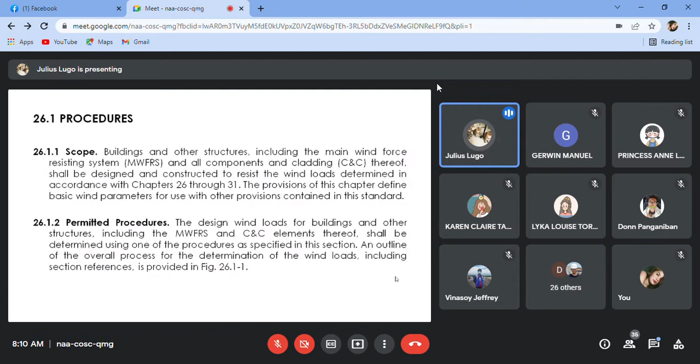In here, we won't be talking about the Philippine setting, but rather the US setting. Though we are using the US setting, in your design later on, it's up to you kung anong gusto nyong gamitin. Pwede kayong mag-NSCP. Actually, halos pareho lang naman yung provisions ng ASCE sa NSCP. Nagkaiba lang yung mga load factors, yung mga constants na ginamit, pati yung variables, kasi magkaiba tayo ng wind loads sa ibang bansa.

Pero if I were you, just use whatever is available in STAAD, kasi pipick ka lang naman doon kung ano yung gusto mong gamitin. Hindi ko alam kung may NSCP doon, pero maraming codes in STAAD. Do you all have STAAD in your computer?

Yes, sir. Okay, so later on, midterms, we will be doing models. Pero hindi na ako magdi-discuss nun, kasi walang STAAD tong computer ko, at saka bulok na siya. Hindi siya pwedeng mag-run ng mabigat na software. So I will just be sending you a video tutorial for STAAD.

Next is permitted procedures. The design wind loads for buildings and other structures, including the MWFRS and C&C elements thereof, shall be determined using one of the procedures as specified in this section. So meron tayong outline. Mamaya, ipapakita ko kung paano natin i-determine yung loads natin for the wind. So yung main wind force resisting system natin shall be determined using one of the following procedures.

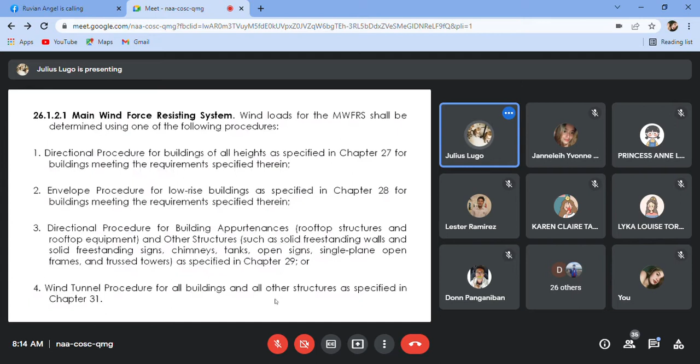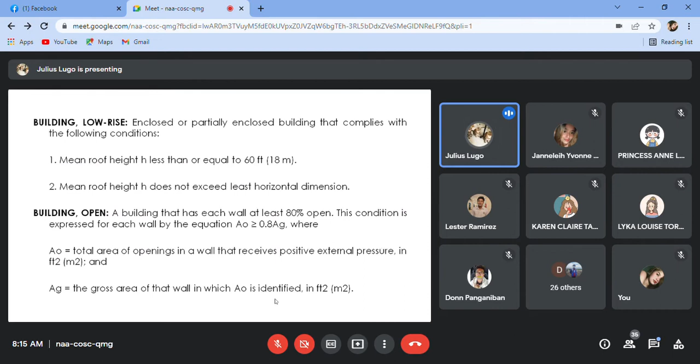Okay, so I'm going to be skipping the definitions because there are so many. Please feel free to read this tomorrow, maybe during our laboratory. Whatever we don't finish today will not be part of the prelim exam, but you have to read that. Although, as I said, the prelim is more on discussion because on the syllabus, we have to discuss the wind loads and loadings before we go to the modeling, okay?

So chapter 26, that's what we're going to discuss today. That's the general requirement used to determine the basic parameters for determining wind loads on both the MWFRS and C&C. These basic parameters are the basic wind speed, which is included in the NSCP, the wind directionality factor KD, exposure type, topographic factors, ground elevation, velocity pressure, gust effect factor, enclosure classification, and internal pressure coefficient.

Upon identifying the general requirements, we now proceed to the methods for both the MWFRS and the C&C. Chapter 26 is on general requirements, then chapters 27, 28, 29 are the procedures for the MWFRS, and your wind loads for the C&C are stipulated in chapters 30 and 31. Chapters 27 to 31 I didn't include in our presentation. We're just going to talk about the general requirements because if I included those, it would take the entire semester, and how much more our seismic analysis.

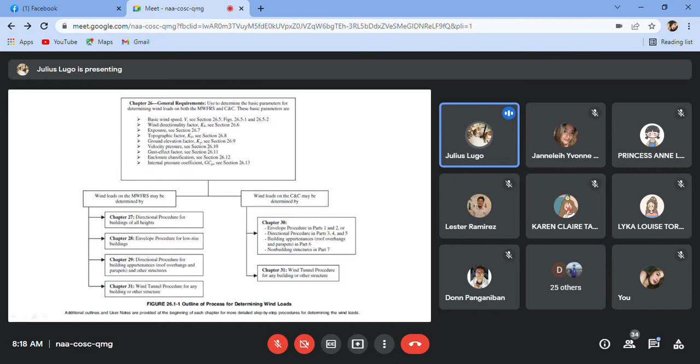So the general requirements. We have the sign convention. When your wind force tends to approach the surface, we consider that as positive pressure. If it tends to go away from the structure itself, you have to put a negative sign for the wind loading. So if it acts on the object, it's positive, like compression and tension. But if it acts away from the object, it should be negative. So that's our sign convention.

Then we have the critical load condition. Values of external and internal pressures shall be combined algebraically to determine the most critical load. So here we just take the sum. We superimpose the internal and external pressure because the wind load is applied not only outside but also inside. So you just take the algebraic sum of the wind loads externally and internally to get the most critical load condition.

Then we have 26.4.3, wind pressures acting on opposite faces of each building surface. In calculation of design wind loads for the MWFRS and for C&C for buildings, the algebraic sum of the pressures acting on the opposite faces of each building surface shall be taken into account. What if on the facade and the rear of the building, both forces are acting towards the structure? Just apply the summation of forces, horizontal and vertical, and take the magnitude of the resultant of the opposing wind pressures, because not every building has forces acting only towards, or towards and away from, the object.

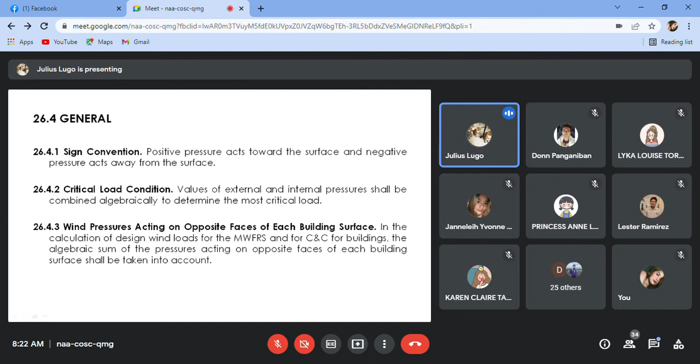Then we have to identify the risk category of the building. This really depends on the hazard map. We have a hazard map in the ASCE code, but I didn't include all of it since there are so many hazard maps, and that hazard map is US-based. So our basic wind speed, V, used in the determination of design wind loads on buildings and other structures shall be determined from figures 26.5-1 and 26.5-2.

The identification of your basic wind speed, V, will be through figures 26.5-1 and -2, except as provided in sections 26.5.2 and 26.5.3. So don't get confused—whatever isn't stated in 26.5.2 and 26.5.3 regarding basic wind speed, go to figures 26.5-1 and -2, and that will be your basic wind speed.

Now, we have different types of risk categories: category 1, 2, 3, and 4. For category 1 buildings and structures, we use 26.5-1A and 26.5-2A. For category 2, we use 26.5-1B and 2B, and so on. So you have to check what risk categorization applies, and the basic wind speed will be identified through the respective figures stipulated in 26.5.1.

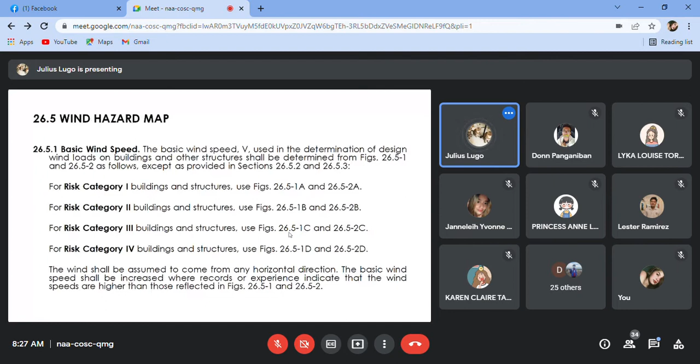Next, special wind regions. We have mountain terrain, gorges, and special wind regions shown in figure 26.5-1 shall be examined for unusual wind conditions. The authority having jurisdiction shall, if necessary, adjust the values given in 26.5-1 to account for higher local wind speeds. Such adjustment shall be based on meteorological information and an estimate of the basic wind speed obtained in accordance with the provisions of 26.5.3.

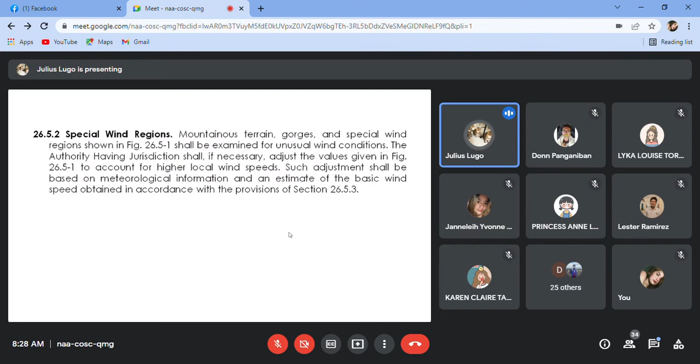So in the case of terrain, mountainous regions and similar, identifying the basic wind speed is not straightforward. You can't just use figures 26.5-1 and 26.5-2 for mountainous terrains and other similar geography, because our basic wind speed assumes horizontal terrain. But in mountainous regions, it's not always horizontal since there's sloping involved.

So here, the authority having jurisdiction should be the one to identify the basic wind speed for that particular region, based on section 26.5.3, to estimate the basic wind speed. I think in the Philippines, that authority having jurisdiction would be the Association of Structural Engineers of the Philippines.

So the estimation of our basic wind speeds comes from regional climatic data. The authority having jurisdiction will be soliciting resources from the Meteorological Society or the regional climatic organization, such as Pag-asa, to determine the latest trend.

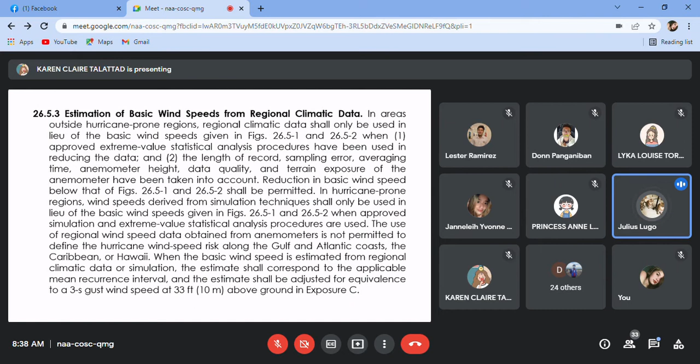So we have different types of exposures that will be discussed later on, but for now I'm just giving a general idea with regards to the exposure type. It depends really on what exposure your building has, and we have conditions on how to determine the exposure type of the building. So let's go to the next slide.

So this, guys, is what I mean by regional climatic data. It's like a topographic map. Have you seen, guys, what is it called? Have you seen a hydrograph?

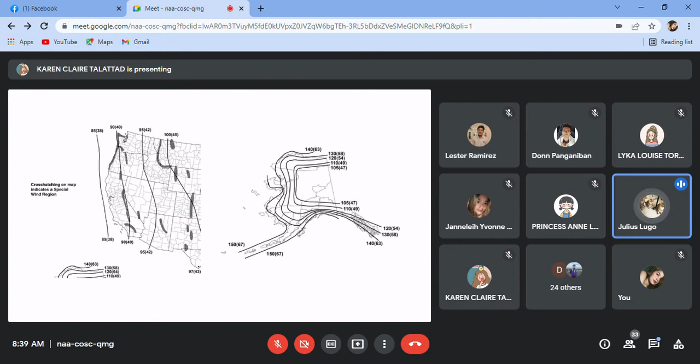You haven't seen that. So these lines, guys, just pertain to the average wind speed, the basic wind speeds of that region. If these lines are connected to each other, similar to your topographic map, those places along that line, along that curve, actually have the same wind speed. It's the same concept as your topographic map.

So in the first figure, you see there, the first curve is 100 and then 45. I think the 100 there is 100 miles per hour, and the one in parenthesis, I think that's 45 meters per second or so. So this, guys, is what we call the wind map, our wind hazard map. The crosshatch there indicates the special wind region.

So, hanapin dito yung place, and then how about if yung inyong place is in between two hatches? What if in between siya nung dalawang place or yung dalawang curve? For example, in the left side, we have 95 and then 100. What if in between siya?

Well, ang ginagawa natin dyan, to simplify the computation, we are not going to take the average. We just consider which is higher in terms of the two cross hatches. So if you were to pick between 95 and 100, hindi pwedeng 95 plus 100 divided by 2 yun na yung magiging basic wind speed mo. Hindi. Ang gawin mo, piliin mo na lang yung higher na curve.

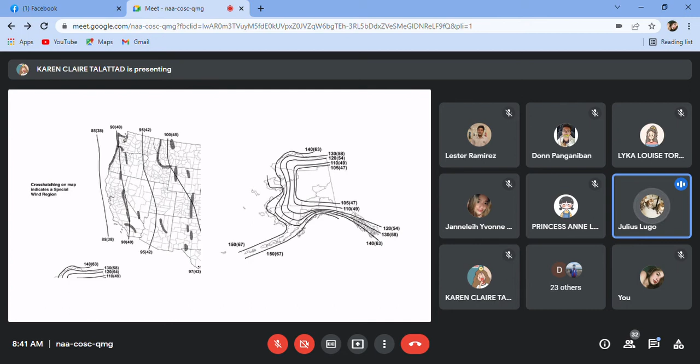Okay, next po tayo. So, meron tayong dito notes for the figure. I won't be doing in-depth discussion of that. Next po.

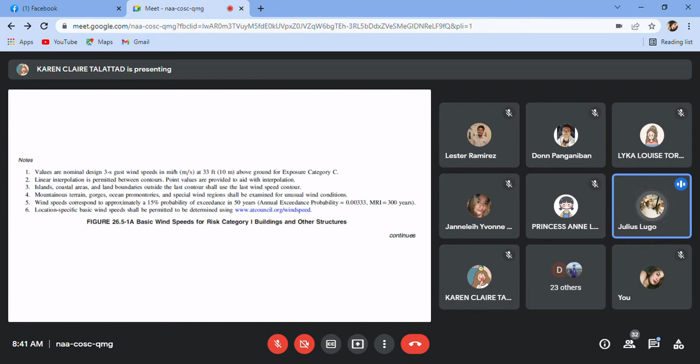So meron din tayo nito. This is a continuation of the map. Meron tayong ibang locations in here. As you can see, meron din tayo dun sa may left side, guys. Parang circular siya, or sabihin na lang natin pa-oval na graph ng wind, basic wind speed natin. So that's 105. And then meron din tayong point lang, kasi in this particular area, the wind speed is 107 miles.

Parang isang point lang siya doon kasi doon lang naman may 107. So meron tayong pa-circular that indicates that the regions around this line are actually having a basic wind speed of about 105 miles per hour or 47 meters per second. Next po.

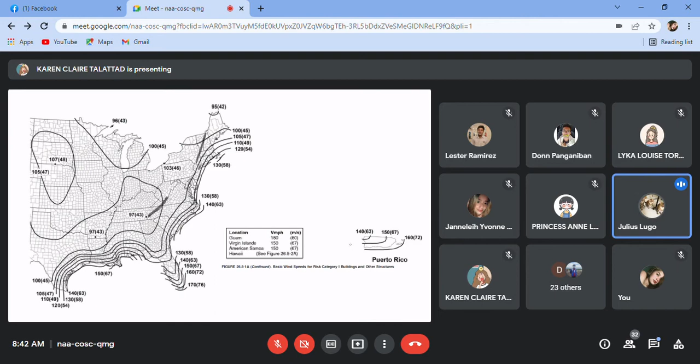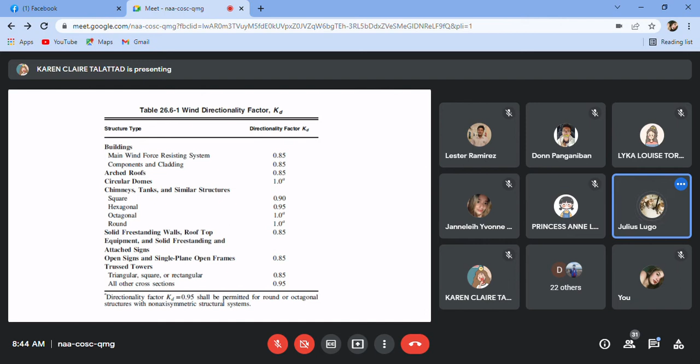So yung directionality factor KD natin will be 0.95. This is permitted for round or octagonal structures with nonaxisymmetric structural systems. Kung meron kayong octagonal or round na structure pero non-symmetric, hindi magkamukha yung half-half nila, you can use KD as 0.95. Follow lang natin tong table na to later on in determining the KD factor. Next po.

Normally, guys, for the MWFRS, 0.85 yung ginagamit. Kapag sabing MWFRS, hindi na kayo titingin sa iba. The wind directionality factor shall be determined from Table 26.6-1 and shall be included in the wind loads calculated in Chapters 27 to 30. The effect of wind directionality in determining wind loads in accordance with Chapter 31 shall be based on a rational analysis of wind speeds conforming to the requirements of 26.5.3 and Section 31.4.3.

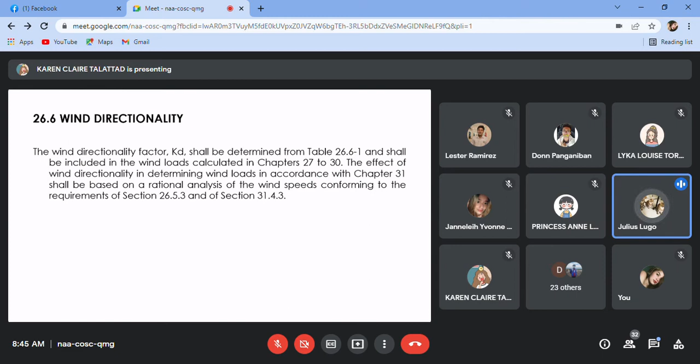A thorough discussion will be made on Chapters 27 to 30. That is for the MWFRS. Next po. So ito naman yung exposure natin. Ano ba itong exposure? For each wind direction considered, the upwind exposure shall be based on ground surface roughness that is determined from natural topography, vegetation, and constructed facilities.

If your building is standalone at walang obstruction, nasa open space lang siya, there's actually a great influence of exposure in the calculation of the wind loads. Kung wala kang masyadong obstruction, yung wind mo will have a great impact on the structure. Pero kung maraming puno and maraming structure around the building that you are designing, walang masyadong exposure.

So that's why we consider exposure. If we do not consider exposure kasi, that will actually compromise your design in terms of economy. Okay, in terms of the economy.

Okay, so wind directions and sectors naman: for each selected wind direction at which the wind loads are to be determined, the exposure of the building or structure shall be determined for 2 upwind sectors extending 45 degrees on either side of the selected wind direction, and exposure in these 2 sectors shall be determined in accordance with sections 26.7.2 and 26.7.3. And the use of which would result in the highest wind loads shall be used to represent the winds from that direction.

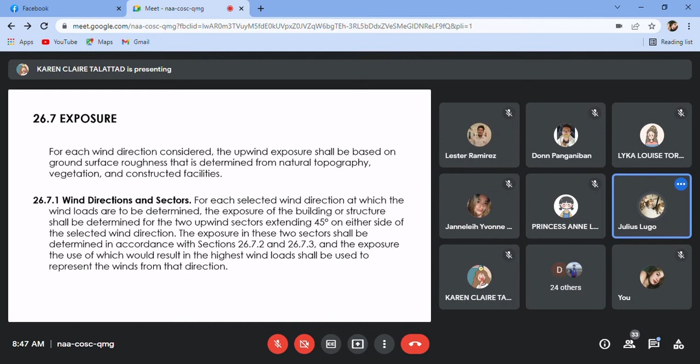So next po. So meron din tayong surface roughness categories, guys. So yung exposure natin actually depends on the terrain as well. Okay, so meron tayong surface roughness B, C, and D. So ano ba itong mga roughness B, C, and D na to? Now, if your building is located somewhere in urban and suburban areas or like maybe rainforest, mga ganyan, with numerous closely spaced obstructions, gamit kayo ng surface roughness B.

Then for surface roughness C, meron tayong open terrain. And then may scattered obstruction siya. Yun yung ating i-consider na roughness. So, check nyo din yung height, guys, nung inyong obstruction. So, if less than 30 feet siya or 9.1 meters, gamit kayo ng surface roughness C. So, technically, yung ating surface roughness C, it depends on the topography of the area, the geography as well. Okay, so check nyo na lang later on kung anong surface roughness.

So, surface roughness D naman, we have flat, unobstructed areas and water surfaces. Ngayon, itong surface roughness D na to, this is actually sometimes used in construction on the sea and mga oceanic part. So, di ba meron tayong mga construction doon, especially when you're trying to build an oil extraction facility in the middle of the sea. So ang ginagamit nilang wind surface roughness doon is surface D. It's not flat. Sabihin natin the sea is not flat.

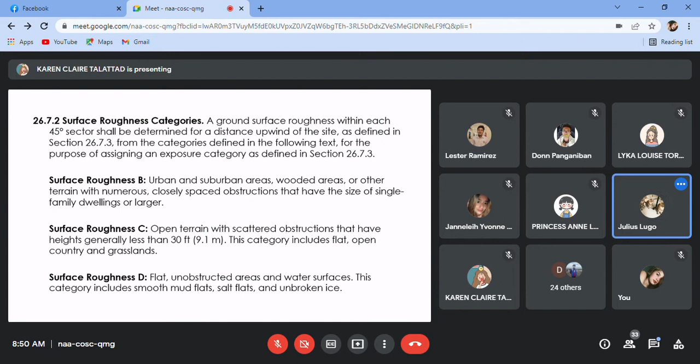Okay. Meron din tayong exposure categories. Exposure B. Oh my God, hindi ko siya na-highlight. Okay, I will just upload na lang later on yung highlight nito. So meron tayong exposure categories, guys. We have categories B, C, and D.

For exposure B, for buildings or other structures with a mean roof height less than or equal to 30 feet, exposure B shall apply where the ground surface roughness as defined by surface roughness B prevails in the upwind direction for a distance greater than 1,500 feet. For buildings or other structures with a mean roof height greater than 30 feet, exposure B shall apply where surface roughness B prevails in the upwind direction for a distance greater than 2,600 feet or 20 times the height of the building or structure, whichever is greater.

So, it depends kung anong height ng building yung kina-consider natin. Yung upwind height na yan, that is actually what we're considering as the particular height of the wind pressure that we are taking into account. Ngayon, if yung mean roof height ninyo is equal to 9.1 or 30 feet, exposure B tayo, if and only if yung surface roughness natin is B, and then yung upwind direction natin is greater than 1,500 feet.

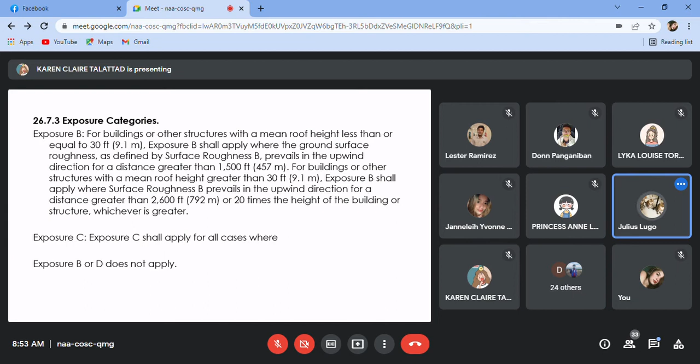So, kung exposure C naman, gamit kayo ng exposure C if and only if hindi applicable yung exposure B and exposure D. So, yun yung condition dyan. So, edit ko na lang ito mga guys, i-upload ko na lang. So, do we have exposure D next po?

Okay. Ito naman yung exposure D natin. So, in the exposure D naman, if your surface roughness is D, okay, and yung upwind direction natin is greater than 5,000 feet, or 20 times the building or structure height, whichever is greater, exposure D shall also apply, okay? So, check nyo lang guys later on kung exposure D siya, you have to see if the surface roughness is under D and then yung upwind direction should be greater than 5,000 feet or 1,524 meters, okay? Or 20 times the building or structure height, okay?

So, yun kasi guys, the higher the building is, the more it is subjected to wind loads. Okay, for example, the Burj Khalifa. You know that the Burj Khalifa has this parang kumbaga parang lengua na design. I don't know if you call it lengua, pero parang tatlong sangay siya, parang starfish na, pero tatlo yung sangay niya. Okay, that is to consider.

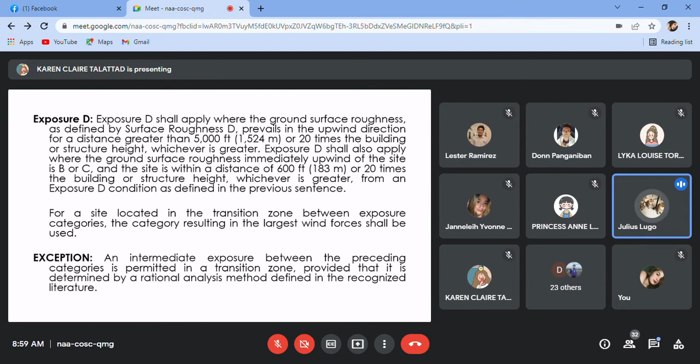Okay. So we have exposure requirements naman tayo. For the exposure requirements, it depends on the procedure that we are going to use. So kanina, di ba, we have this procedure na sinabi. Pero yung mga procedures are discussed in each chapter after this particular chapter, so 27 to 31. So let's have a review. What were the four procedures for the main wind force resisting system stipulated earlier?

Sige, tawag tayo ng isa. Tingnan natin kung natandaan pa nila. Okay. So kanina, ito guys, these are the first two procedures that were stipulated earlier.

Ano pa yung dalawa? Try natin si Calvan o Ruth Keely. Nandito ka ba? Okay lang guys, if you say na, sir, nakalimutan ko. Okay lang yun. Okay?

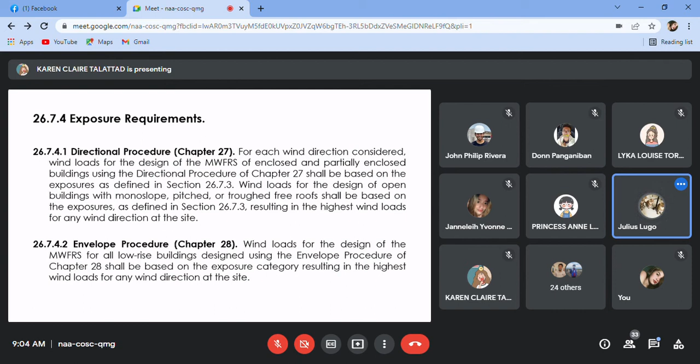So yung wind direction kasi natin, guys, there are four corners or four faces of the building. Siyempre, we have yung leeward face, mga ganyan. Then we have yung side faces. You need to apply din doon kung ano yung inyong wind loading later on, and then you just have to check kung ano ba yung most critical or gives you the maximum value for the loading. Okay, next tayo.

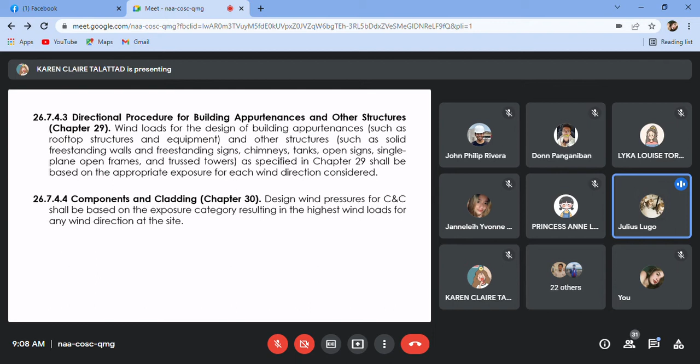And that is just similar to your components and cladding. For this C and C, kung ano yung exposure na bibigay sa atin ng highest value, yun yung gagamitin natin. So it will be to your research na lang kung ano itong components and cladding. What do we mean when we say components and cladding? Research na lang yun, guys, on your end. Okay, so next slide, please.

So we're actually considering topographic effects. What do we mean when we say topography? Anyone from the group? You can chat na lang, guys, what do we mean when we say topography. I-chat nyo na lang kung anong ibig sabihin ng topography in your case.

Natural feature of an area, sir. Okay. So yun, guys, the very basic definition of topography is the natural feature of the area. So the physical characteristics. Ano ba yung particular na vegetation na meron dyan? Marami ba siyang puno? Mga ganyan. So yun yung tinatawag nating topography.

So in the determination of wind loading, nasa na ba yung slide ko? Wait lang. Okay. So we need to consider the topographic effects. So ano ba to? Meron tayong wind speed-up over hills, ridges, and escarpments. I-search na lang kung anong definition ng escarpment na yan.

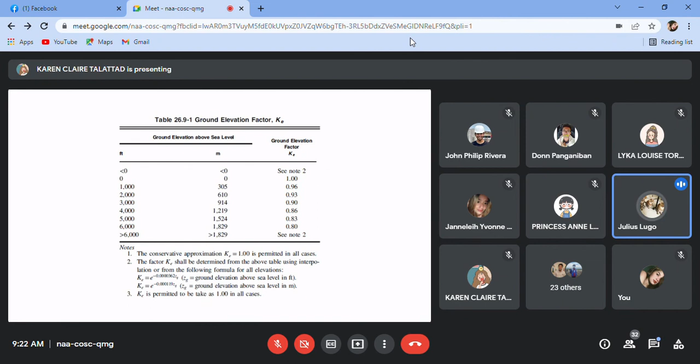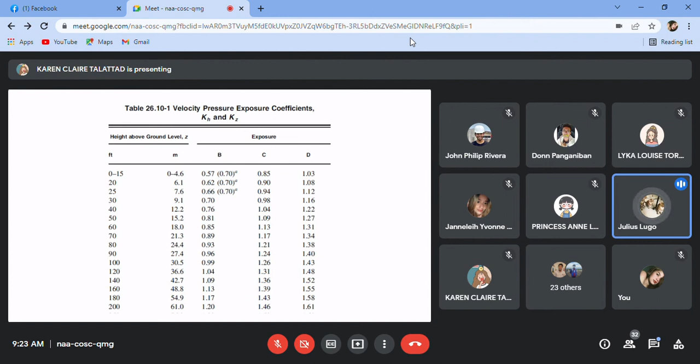Most of the values here are actually in terms of the table. Next, we also have a formula we consider if the height of the building doesn't fall into our table. But rarely does the height of the building fail to fall into our exposure type.

For example, if the height of the building is 152.4 meters, that's high-rise. But if the actual height is just 152, you can just use 152.4, as long as it's close to the values stipulated on the table. But if not, if it is actually lower, if the Z is lower than 15 feet, use this formula instead.

KZ equals 2.01 times Z over ZG, raised to 2 over alpha. The alpha and ZG values are tabulated in 26.11-1.

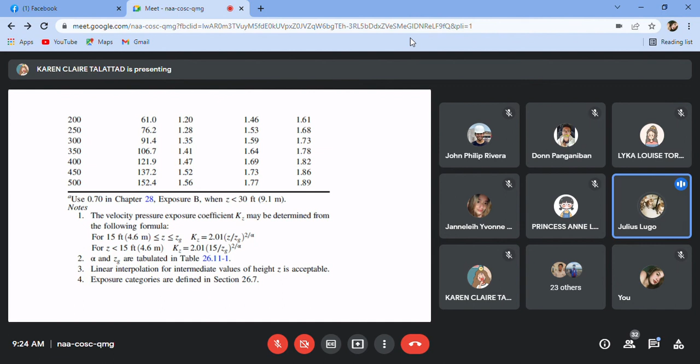Okay, next we have velocity pressure. This is for the velocity pressure. So earlier we discussed basic wind speed, that's V. Now we discuss velocity pressure, designated as QZ. So what is this QZ?

If you can still remember your hydraulics, or like geotech, Q equals area times velocity. Your velocity actually produces a pressure as well. If you still remember velocity head, elevation head, and pressure head - that's similar to what we call the velocity pressure QZ.

So how do we evaluate the velocity pressure QZ? You need to identify first the height, the height of the building above the ground. This is the formula we'll use.

So the second formula is what you'll use since that's in terms of SI units. The first formula is in terms of miles per hour. So your QZ will be 0.613 multiplied by KZ, KZT, KD, KE, and V squared. We already know V, that's the basic wind speed, and KE is the ground elevation factor.

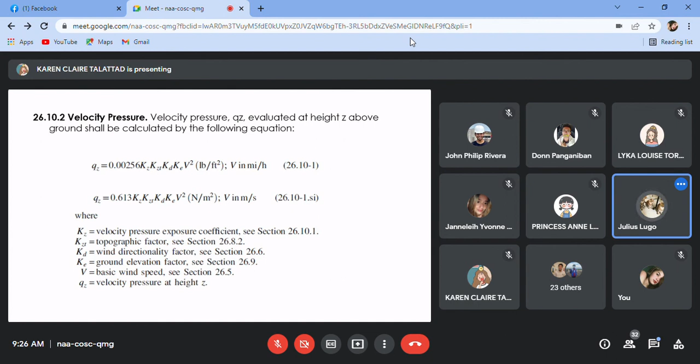Next, so it says the velocity pressure at mean roof height is computed as QH equals QZ evaluated from equation 26.10-1. That's the same equation given to you earlier.

Using KZ at mean roof height H, the basic wind speed V used in determination of design wind loads on rooftop structures, rooftop equipment, and other building appurtenances shall consider risk category equal to the greater of the following. So you have to check the risk category as well - remember we have risk categories 1, 2, 3, 4. The first risk category is for the building on which the equipment or appurtenances are located, or the risk category for any facility to which the equipment or appurtenance provides a necessary service. So that's our basic wind speed V.

Let's base it on our risk category from earlier. Although we already have a method on how to determine V. To determine V, we have to check the wind map - that's the velocity, the basic wind speed is actually based on the wind map shown earlier. Now, if you think the basic wind speed is insufficient for the design, you can ask your regional climatic agency, which will provide you the regional climatic data later on.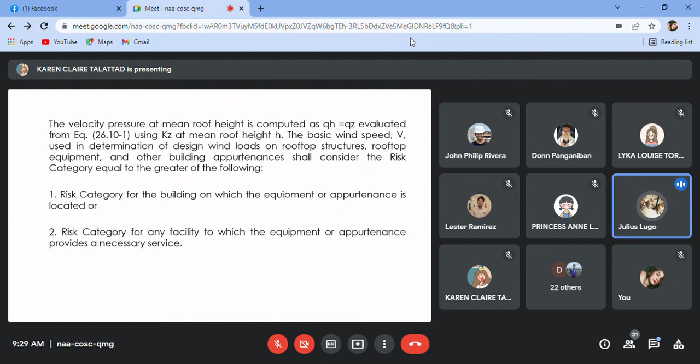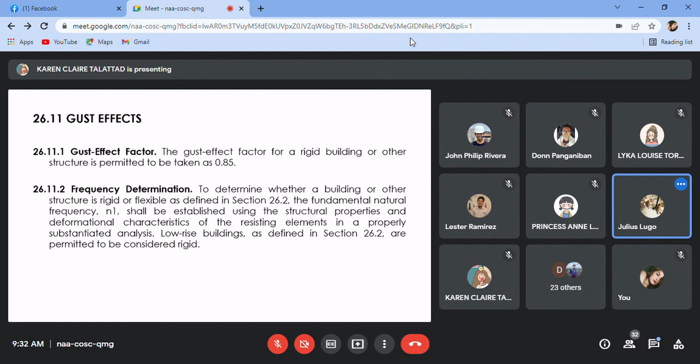Now we have limitations for approximate natural frequency. If we approximate the natural frequency, we can do that, but we have to set limitations. As an alternative to performing an analysis to determine N1, the approximate building natural frequency NA shall be permitted to be calculated in accordance with 26.11.3 for structural steel, concrete, or masonry buildings meeting the following requirements: the building has a height of 300 feet or 91 meters or less, and the building height is less than 4 times its effective length - take note, both conditions must be met.

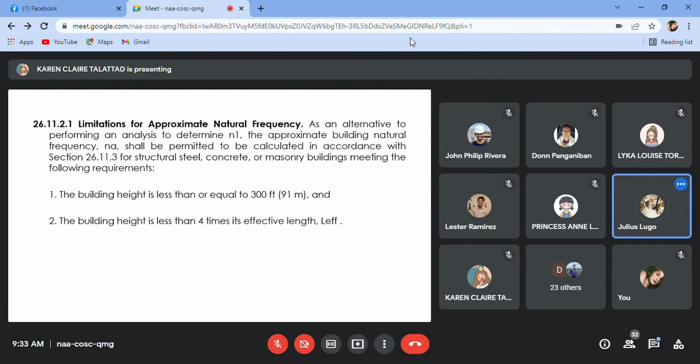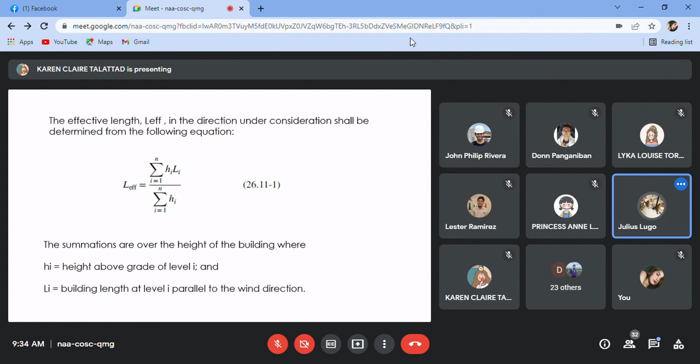How do we determine the effective length? In the next slide, we'll give the formula to determine the effective length in the direction under consideration. First, you need to determine which direction is most critical, and then get the effective length, given by equation 26.11-1.